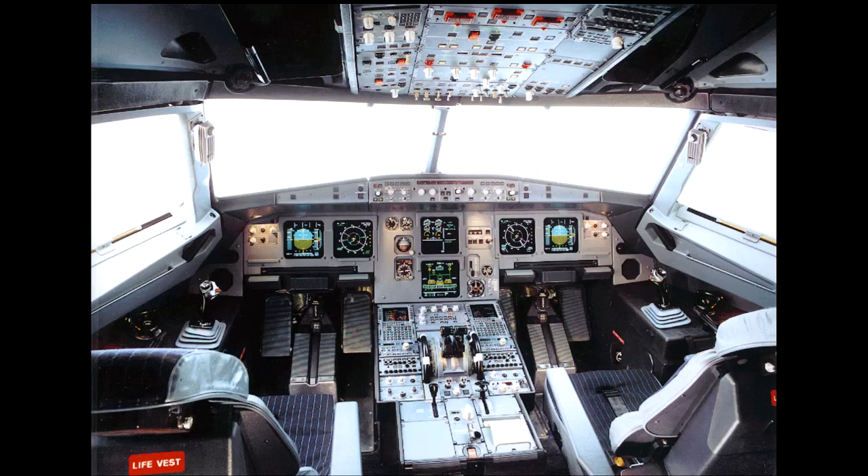You are in the preliminary cockpit preparation phase. To better illustrate what occurs in the pneumatic system, select the ECAM bleed page using the ECAM control panel.

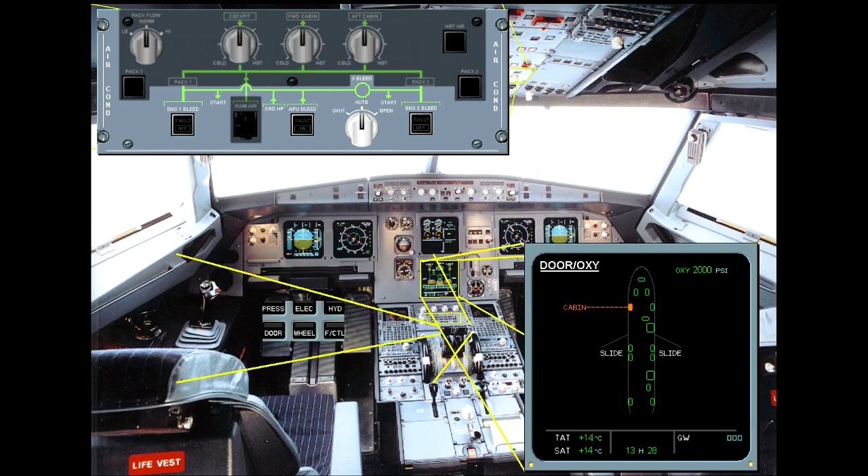The engine identification numbers are displayed amber because the engines are not running.

The normal position of the bleed switch is the lights out position. This means the valves are automatically controlled by the pneumatic system. During the preliminary setup, the engine bleed valve should be in the fully closed position because the engines are shut down. On the ECAM bleed page, note that the bleed valves are cross-line green because they are automatically closed.

The high-pressure valves are also automatically controlled by the system. They are also displayed cross-line green to indicate that they are fully closed in the auto position.

The bleed temperature is displayed in green. The bleed pressure is displayed in amber because there is no pressure supplied.

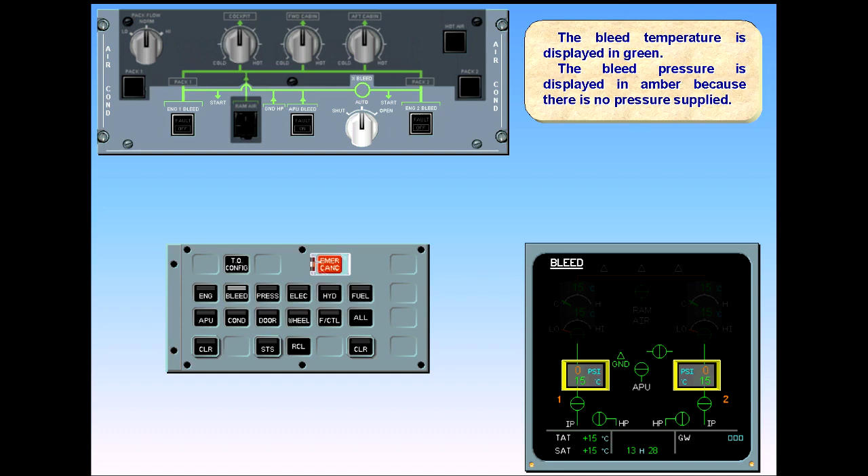The ground high-pressure connection indication is always displayed in green when the aircraft is on the ground, whether the ground unit is connected or not.

You also have to check that the cross-bleed selector is in the auto position. Observe the indication on the ECAM. The cross-bleed valve is displayed cross-line green because it is automatically closed by the system.

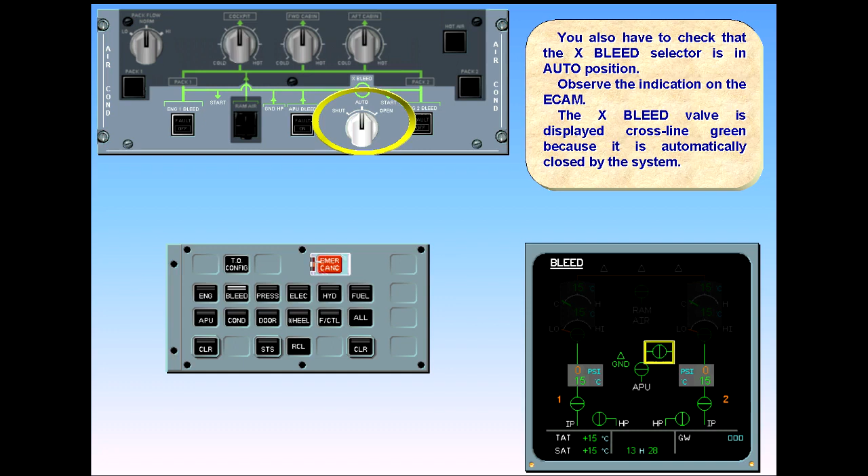Since the APU bleed push-button switch is selected off, the APU bleed valve is displayed cross-line green, indicating that it is closed.

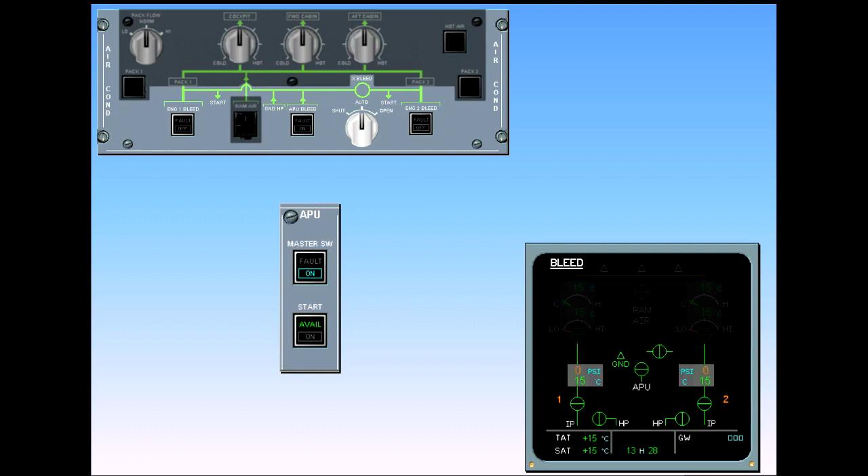Shortly before pushback, the APU will be started. The APU has already been started, but the bleed air must be switched on. Switch APU bleed on.

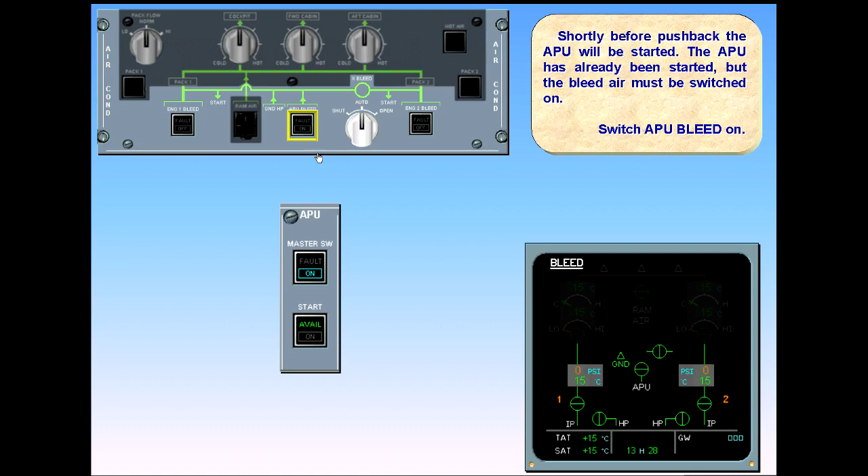Observe the indications. The APU bleed valve is displayed inline green, indicating it is now open. The left side bleed pressure and temperature are displayed in green because they are in normal range.

The cross bleed valve is automatically opened. It is displayed amber during transit and inline green when fully open. And the right side bleed pressure and temperature are displayed in green.

When the valve is open, the APU bleed memo is displayed on the engine warning display.

Usually, APU bleed air is used for engine start. The pressure displayed on the bleed page is also indicated on the ECAM engine page, which will be explained in the engine chapter.

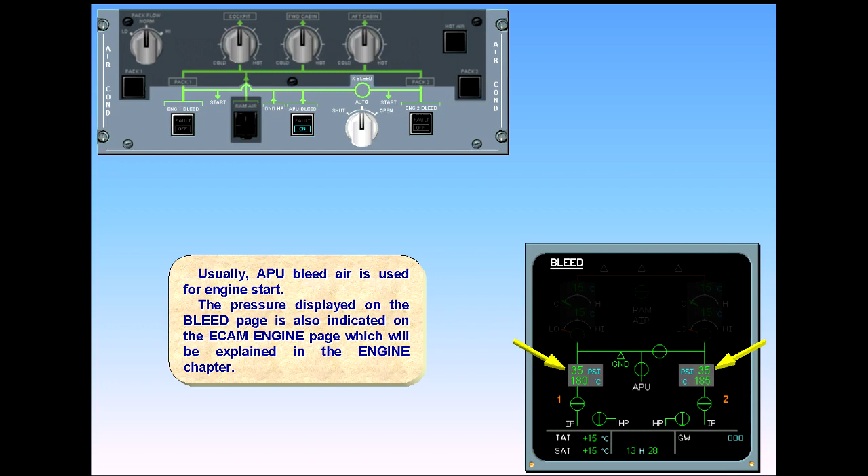Notice that the engine identification numbers have turned white, indicating that the engines are running. The engine bleed valves remain closed because the APU bleed valve is open and the APU has priority over the engine bleed. Now you may switch off the APU.

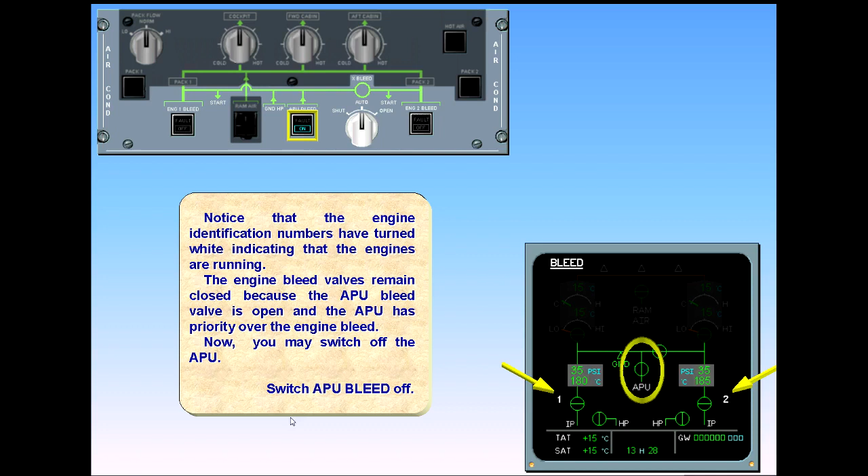Switch APU bleed off. Observe the ECAM. The APU bleed valve is closed.

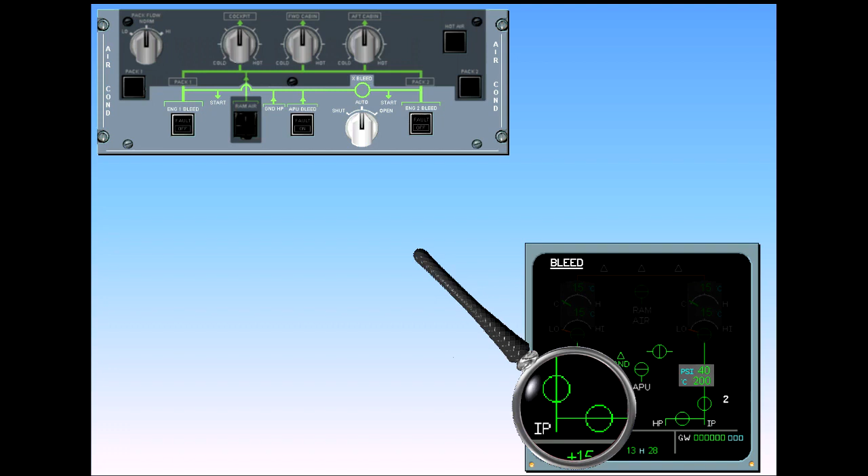The cross bleed valve is automatically closed. It is displayed amber during transit. The engine bleed valves and high-pressure valves are displayed inline green because they have been automatically opened.

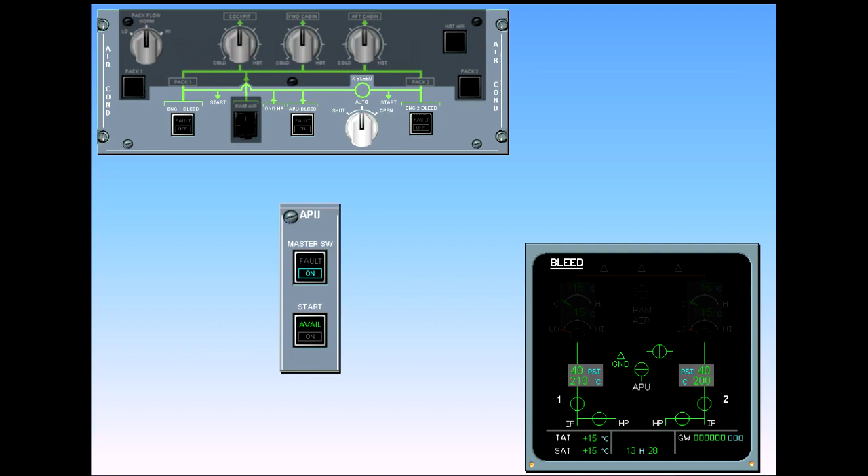There is an automatic 2-minute time delay when the APU is shut down after bleed usage. We will now switch off the APU. Click on the APU master switch.

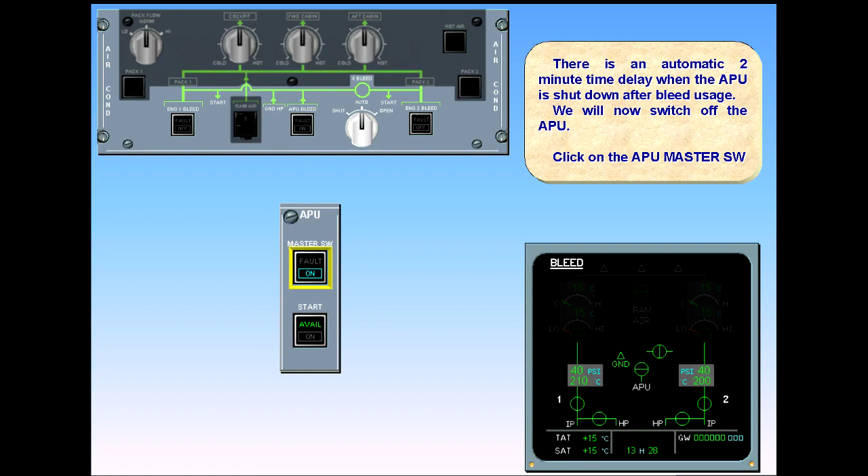With the APU master switch push button in the off position, the APU bleed valve is no longer displayed on the ECAM.

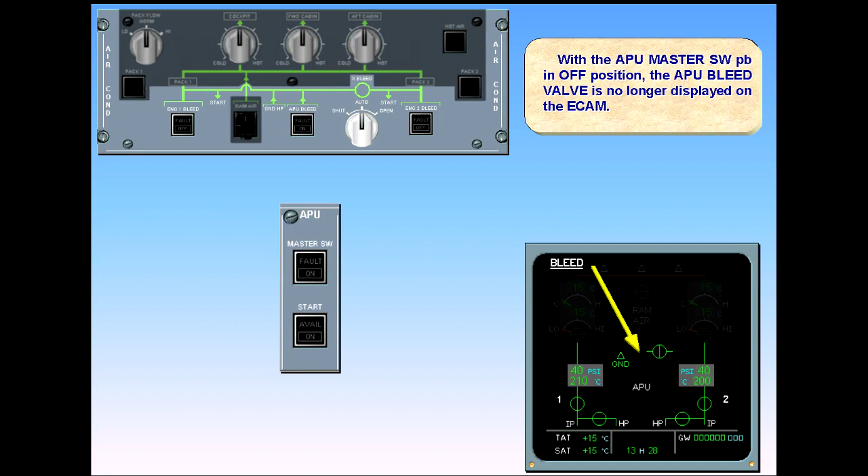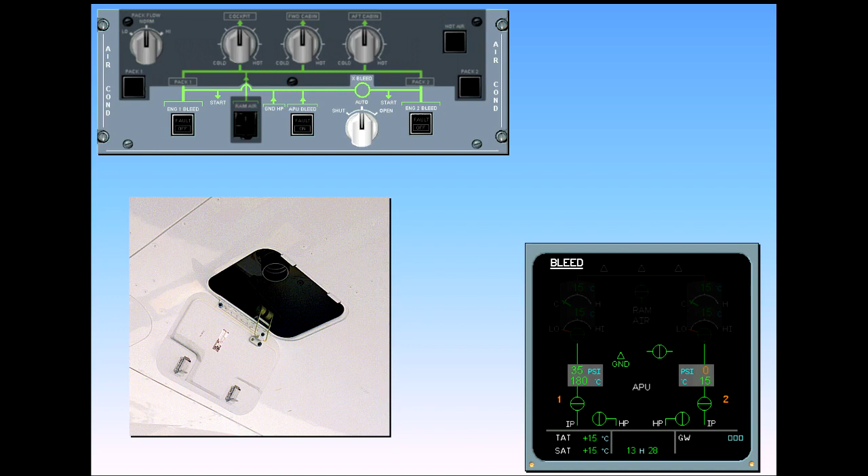If the APU should be inoperative for bleed air supply, a ground high-pressure air unit can be connected to provide pneumatic pressure for engine start. The ground unit's pressure and temperature are indicated on the ECAM.

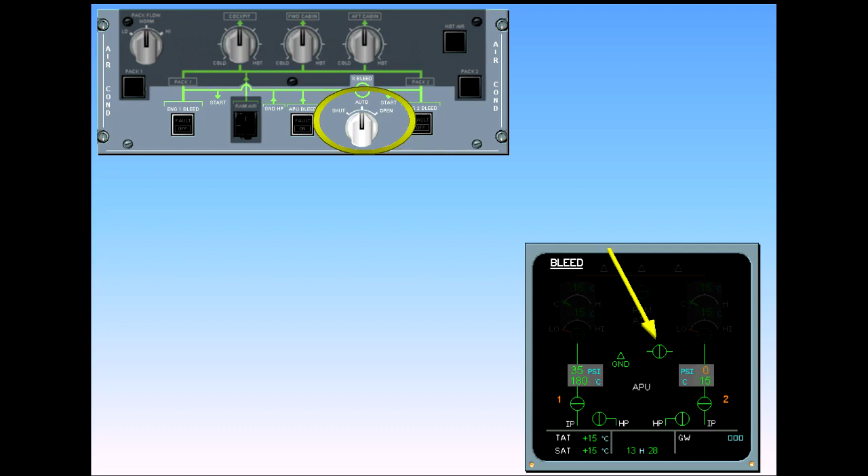Notice that in this case the cross-bleed valve remains closed with the cross-bleed selector in auto position. In order to start engine 2 first, you have to set the cross-bleed selector manually to open. This is done according to a procedure in the flight manual.